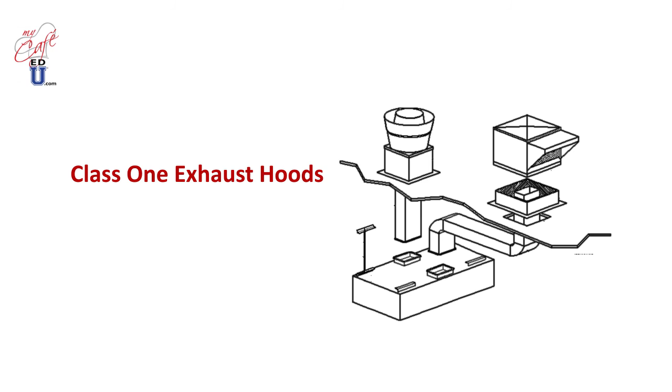Today we'll be learning about the components of Class 1 exhaust hoods. These components include exhaust hoods, exhaust fans and curbs, supply fans and curbs, and duct systems.

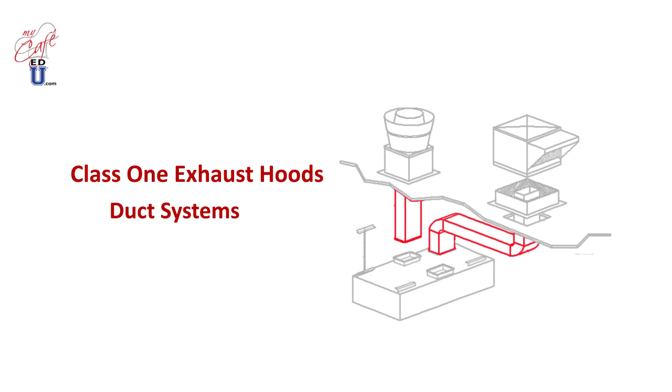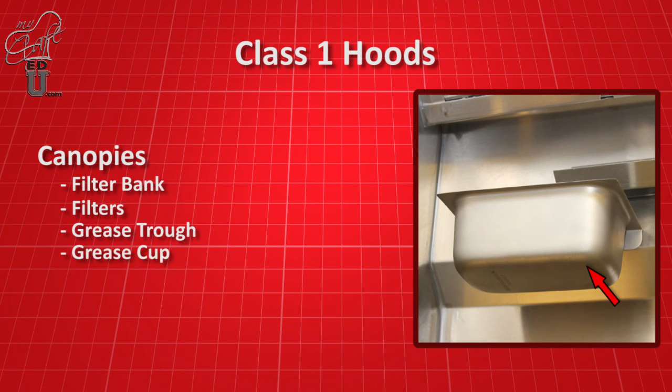Let's get started with the exhaust hood. Class 1 exhaust hoods, or canopies, are the primary device for capturing the grease-laden vapor, heat, and smoke that emits from the cooking equipment. Canopies are comprised of a filter bank, filters, grease trough, grease cup, exhaust riser, supply riser, lights, and makeup air perforated plenum.

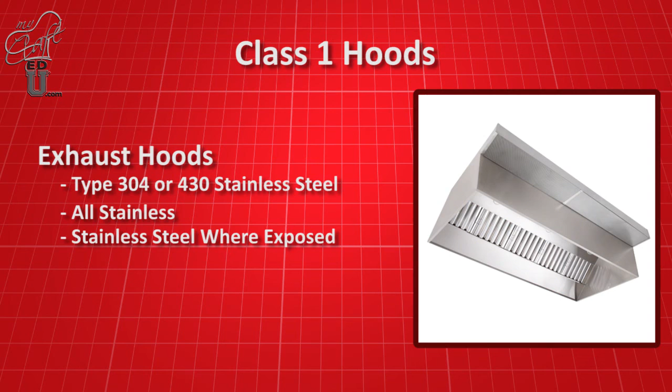Exhaust hoods are made from type 304 or 430 grade stainless steel and are available in all stainless steel or stainless steel where exposed for economy applications. Stainless steel where exposed simply means what can be seen is stainless steel. The top panel against the ceiling is made from standard steel.

The length and width of the canopy is determined by the overall length and width of the equipment under the hood. Exhaust hoods are available in 48-inch, 54-inch, and 60-inch depths. Heights are available in 24-inch and 30-inch tall.

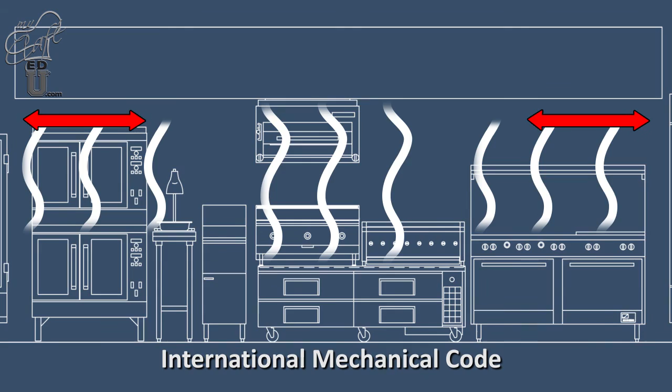The International Mechanical Code requires that canopies must extend beyond all cooking surfaces by a minimum of 6 inches on the front and ends. This is to ensure the hood is large enough to capture the rising, hot, grease-laden air as it expands up and away from the cooking surface.

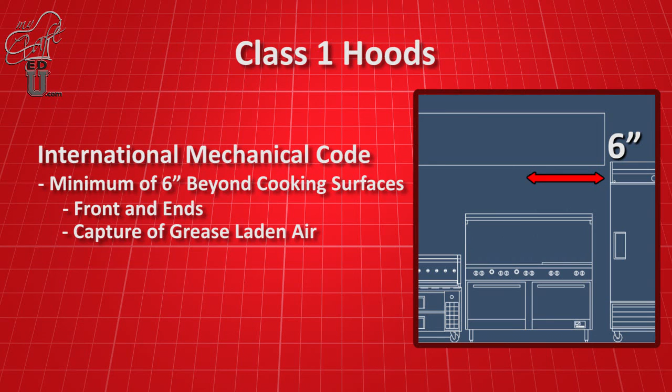The filter bank, which holds the filters in place, is installed at a 45-degree angle inside the hood. The most common filter used in Class 1 exhaust hoods is the S-baffle type. The S-baffle design essentially whips grease particles out of the airstream as the grease-laden vapor passes through the filter.

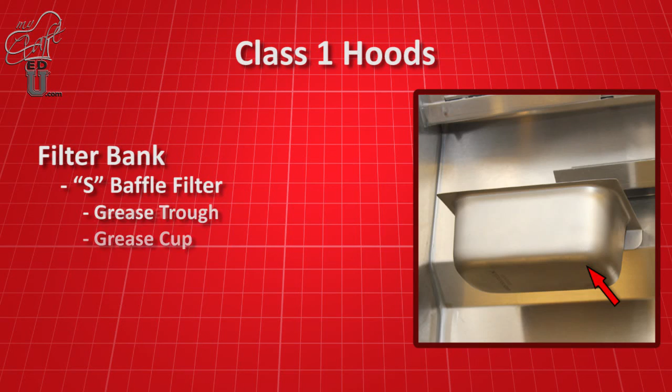The grease drains down the filter and into the grease trough. The grease trough drains the grease into the grease cup located at the end of the hood for removal. S-filters are easily removed for cleaning by raising the filter slightly and sliding the bottom out. S-filters are available from manufacturers in aluminum or stainless steel.

Even the best filter systems do not remove all of the grease from the airstream. Periodic cleaning of the ductwork will need to be performed by a licensed professional. The frequency of cleaning is determined by the cooking load and the amount of grease accumulated over a given period of time.

Finally, factory pre-wired incandescent light fixtures with tempered glass globes are available as an option. Bulbs are not included with light fixtures and will need to be purchased by your customer.

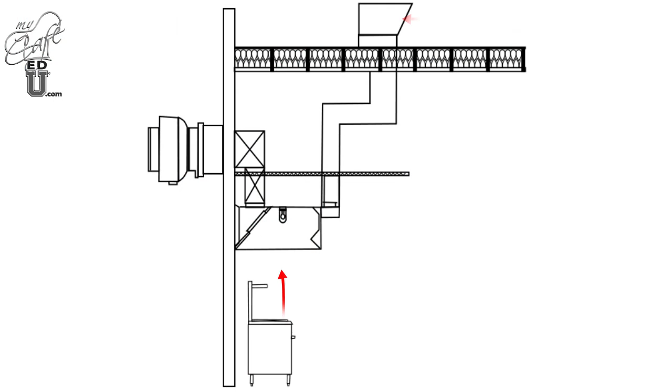Once the grease-laden air passes through the filters, it exits the hood through the top-mounted riser. The riser is connected to the duct, where it travels to the exhaust fan and exits the building.

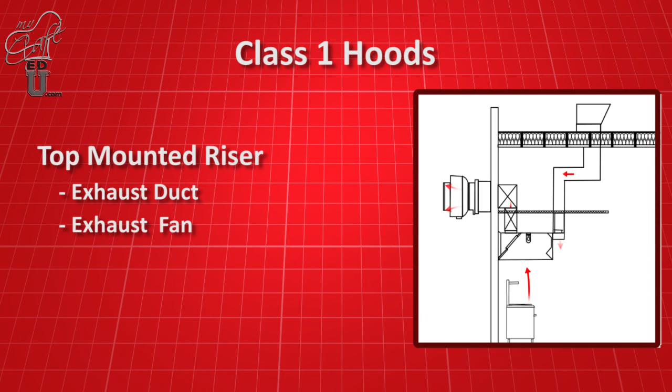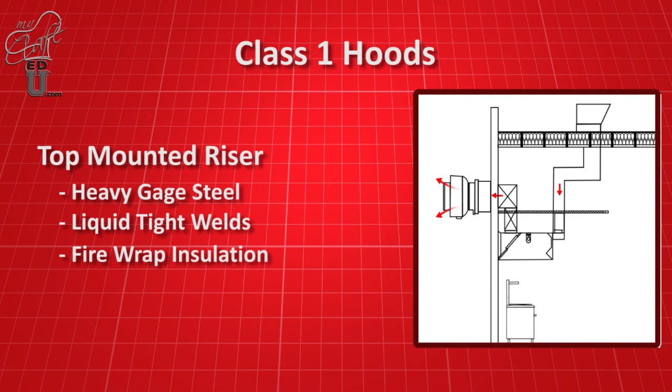The exhaust ductwork is typically constructed of heavy gauge steel and is required to have a liquid tight weld on all welded joints, and fire wrap insulation to prevent flame or heat transfer to wood or other combustibles.

Exhaust fans feature an aluminum exterior housing and are comprised of a 115, 208, or 240 volt single phase motor, wheel, pulley, and belt that pulls the air through the ductwork and out to the exterior of the building.

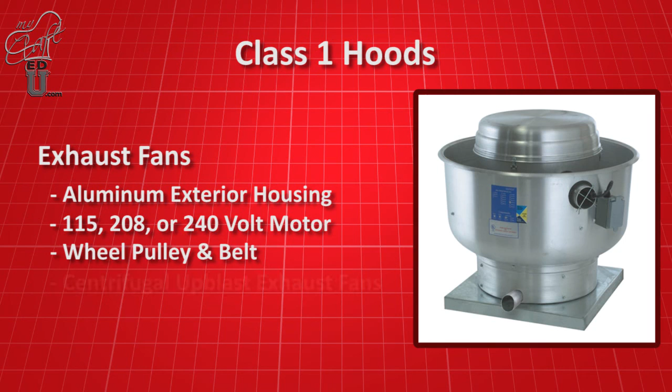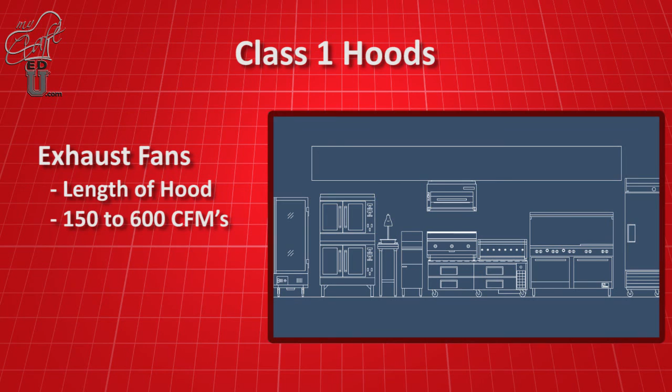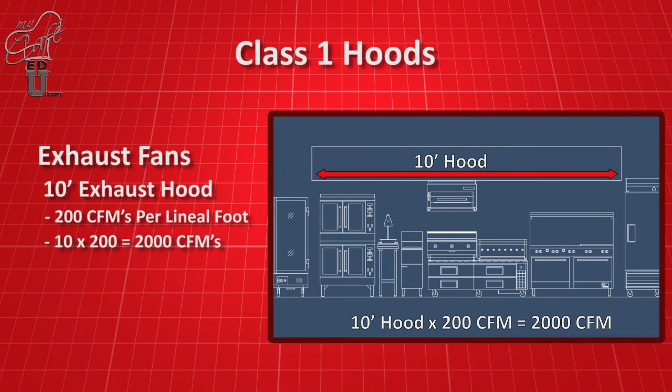These fans are commonly called centrifugal upblast exhaust fans. The size of the exhaust fan and CFM is determined by the length of the exhaust hood. Exhaust fans can extract from 150 to 600 CFMs per lineal foot of hood. So, for example, a 10-foot long hood with 200 CFMs per foot of hood would require a fan that produces 2,000 CFMs. Exhaust fans are mounted on a curb, which is attached to the building.

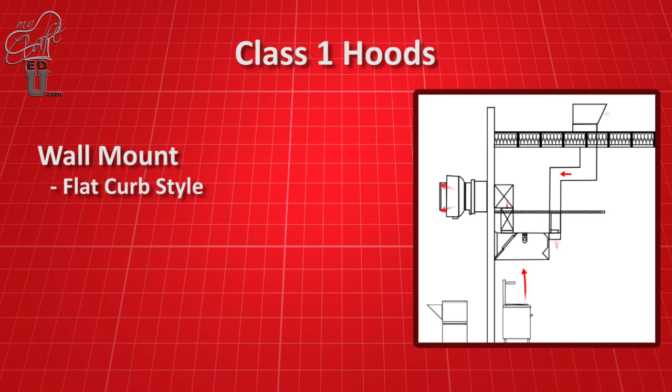Fans and curbs can be located in three primary locations. The first is the wall mount application. Wall-mounted fans require a flat curb that is mounted on the exterior wall of the building. Wall mount fans and curbs are typically utilized when there are multiple stories or floors above the kitchen area.

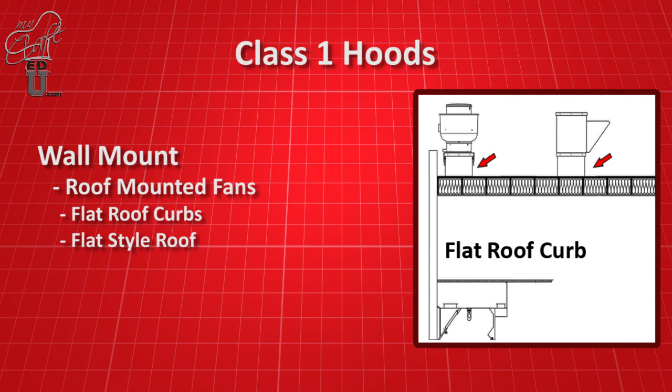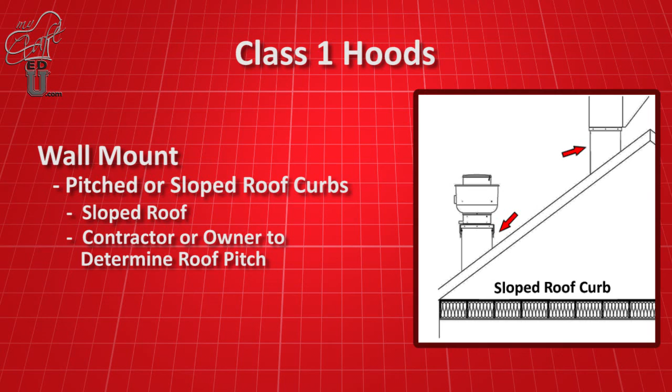Roof-mounted fans and curbs are available in two styles: flat roof curbs and sloped roof curbs. Flat roof curbs are of the same design as wall curbs, but mounted on a flat-style roof for fan mounting. Sloped roof curbs are used in applications where the building or structure has a pitched roof. When specifying sloped roof curb applications, you will need to speak with the contractor or owner to determine the roof pitch so the hood manufacturer can ship the correct curb with your exhaust hood and fans.

Supply fans or makeup air fans are required by International Mechanical Code to be included with hood systems to replace the air that is extracted by the exhaust fan. Supply fans are designed by hood manufacturers to replace 70 to 80% of the exhaust air as a general rule. For example, if your customer has a 10-foot hood and the exhaust fan is rated at 200 CFMs per lineal foot, the total CFMs would be 2,000 CFMs. The supply fans for 70% makeup air would be 1,400 CFMs and 1,600 CFMs for 80% makeup.

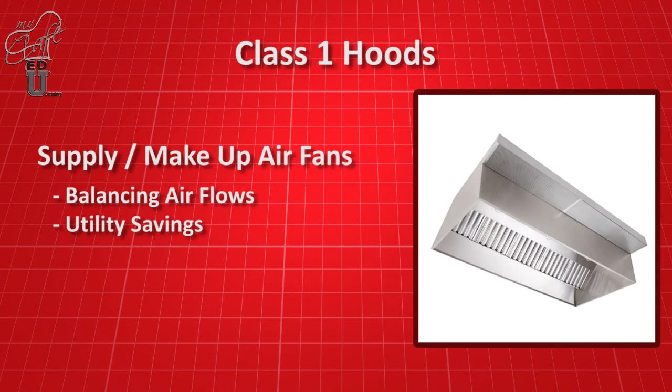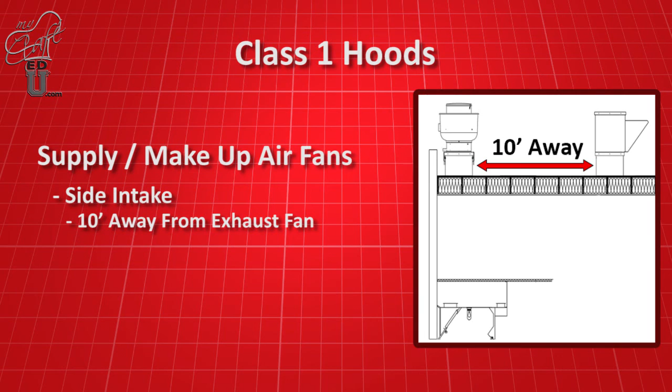In addition, supply fans assist in the balancing of airflows to prevent building pressure-related problems as well as utility savings. Makeup air fans typically have a side intake and are required by code to be at least 10 feet away from the exhaust fan to prohibit grease-laden air from exiting the exhaust fan and re-entering the building through the makeup air fan. Makeup air fans are available in 115, 208, and 240-volt single-phase and in non-heated and heated makeup air units for colder climates. This simply means the outside air is tempered or heated as it passes through the supply duct before entering the plenum.

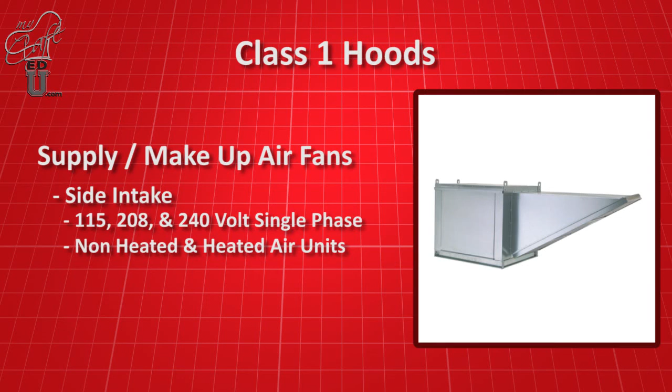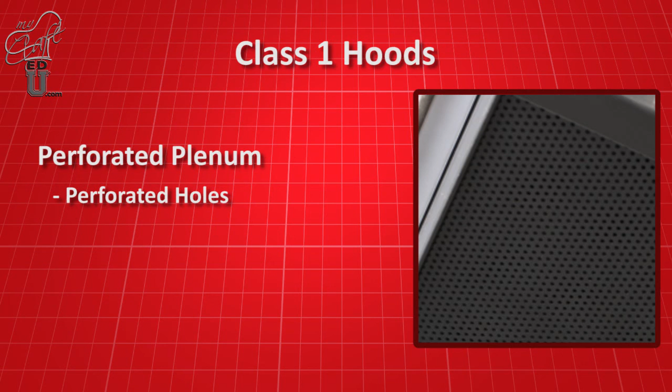The plenum runs the length of the hood and is located on the front exterior of the hood. Plenums feature perforated holes the entire length of the plenum to allow for a gentle down discharge of the incoming air. The air flows down the face of the hood and is where a large percentage is recaptured by the exhaust fan, pulling it back into the hood and out the exhaust duct to complete the cycle of airflow.

Control panels and light switches for Class 1 exhaust hoods and fans are typically located on the front of the hood for easy access or in a wall-mounted control panel.

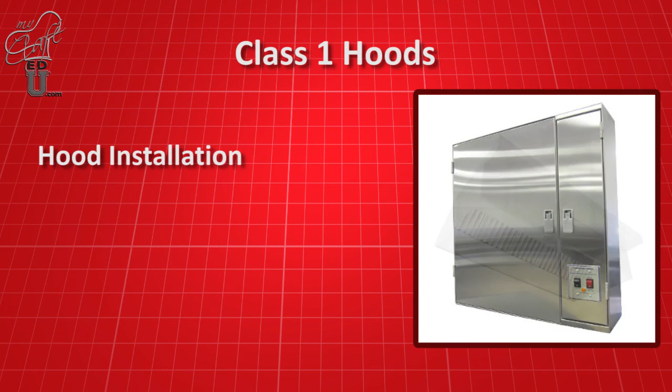In closing, make sure you let your customer know they will require several trades to complete the installation of their Class 1 exhaust hood. They include a general contractor to provide the roof, ceiling, or wall penetrations for the ductwork, a roofing contractor to seal the roof curbs to the roof if the fans are located on the roof, an HVAC contractor to install the ductwork, curb, and fans, and an electrical contractor to bring power to the fans and exhaust hood.